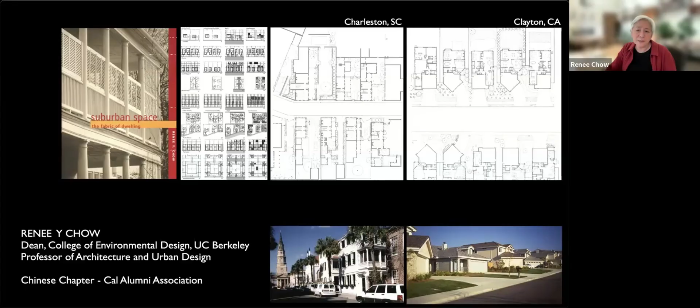Urban challenges of the 21st century, flooding and drought, resource depletion, and housing scarcity, all require solutions that are locally rooted. My research has been to develop analytic and generative design tools for mapping and transforming locales by integrating landscape, urban, and architectural systems across sites and across individual buildings. While adapting our communities for climate resilience, we can also build the unique legibility of every neighborhood. The two major contexts for my work, on the left, the American suburbs, and now the dense urban cities of China.

CED first began collaborating with HKU in 2005 when Weijen Wang and I both ran studios to design an interpretation of the Lilongs in Shanghai.

In 2019, as Chris referred to, the two colleges established a formal design research collaboration through the funding of Berkeley alums that include Chris, so thank you, Chris, to work on designs that addressed urban resilience in the two Greater Bays. We did one year of work around the Pearl River Delta, but the following year when CED was working on stormwater systems in Kennedy Town in Hong Kong, COVID hit in March and the studio was supposed to travel to Hong Kong the week later.

The year after that, we were remote, so the studio then worked in San Francisco. The Hong Kong studio did not work in parallel because they couldn't make it to San Francisco. But nonetheless, we transferred those lessons back and forth. And in 2023, the work of all three studios and the parallel work done at HKU was presented in Central Market in Hong Kong, and we had a great discussion there with academics and Hong Kong government officials.

So the title of my talk is Urban Waters, and this was the topic of the last two HKU CED studios. In this map that shows areas of high risk for flooding, heat stress, water stress, wildfires, and hurricanes, all of these items revolve around the challenges of having either too much or too little water. And we wanted to explore what architecture could contribute to helping to mitigate this challenge.

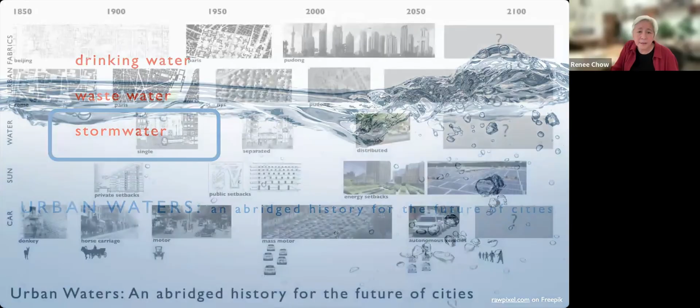So here's a pictorial history of cities in relationship to water, energy, and transportation systems. In the late 19th century, cities were continuous, low-rise urban fabrics, maybe 1 to 6 stories, as illustrated by Beijing on the top and Rome on the second row. Stormwater ran freely through the streets and paths of each city, following the overall contours of the local watershed.

In the early 20th century, there are three major shifts in urban systems. One is the introduction of storm and sewer water systems, which I'll talk about more in a moment. The second is the introduction of mass-produced motor cars and all of the street network required to support those cars. And then the third is the recognition that some medieval urban fabrics lacked light and air, so the proposed solution was sunlight setbacks, coupled with high rises spaced far apart from each other. All of this contributes to the breakage of the continuity of urban fabrics.

And so as we look at our current century, we can now see how this history of development has exacerbated our climate challenges. Today, cities are roughly 60 to 70% of global greenhouse gas emissions, primarily through energy consumption in buildings and transportation.

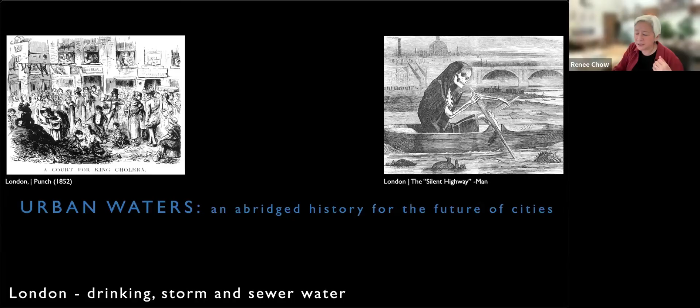But it wasn't until what was called the Great Stink of 1858 that the British government addressed the urgency of the problem and built a new underground sewage system throughout the city. They built what we now call a single or combined sewer system that carried both black wastewater and stormwater from the rains. The solution, at least at that time, was to avoid contaminating the potable water for the city.

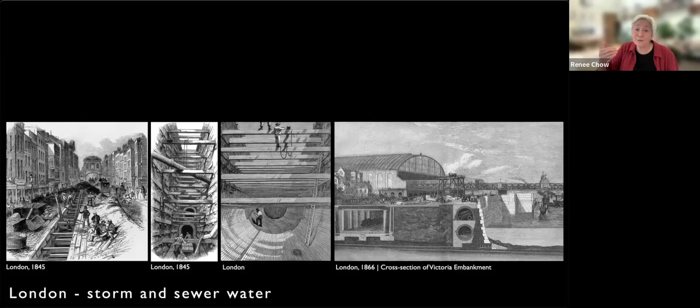The new sewer system discharged water downstream of the City of London. So potable water was taken upstream and contaminated water was discharged downstream. So while this system worked great for the residents of London, it was really not so good for the cities and the residents downstream of London. And this is the system that was implemented in cities throughout the world.

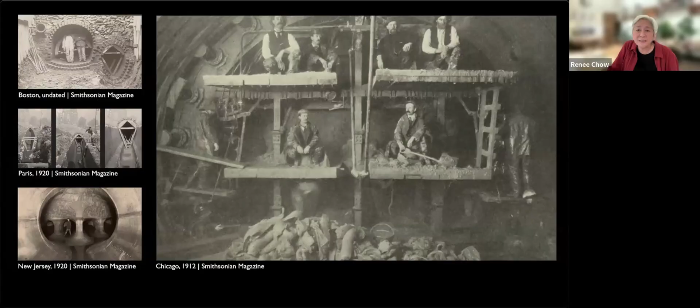So let's move back to our 2 case studies, Pearl River Delta and the San Francisco Bay. My first question, where does Hong Kong get its potable water? 80% of Hong Kong's drinking water is imported from China. The remainder comes from reservoirs and water desalination.

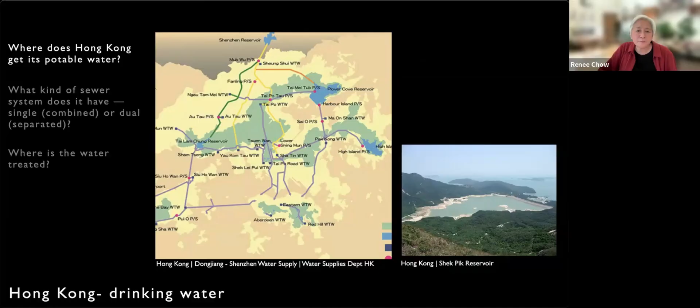What about Hong Kong's sewer and stormwater systems? In 1841, China ceded the island of Hong Kong to Britain. Thus, in the 1850s, Hong Kong adopted, or had thrust upon them, the British combined sewer and stormwater system that discharged to the surrounding bay. Thus, like London, Hong Kong has an extensive tunnel system throughout the island.

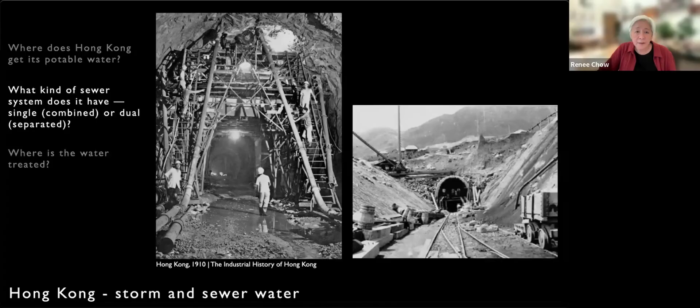At the time, the population on Hong Kong was less than 100,000, so the domestic sewage that went into the bay did not cause substantial damage to the ecology of rivers and the coast. But as the urban population grew in the early 20th century, the hygienic issues of the combined system emerged, just like in London, and the Hong Kong government built a separate drainage and sewer system, splitting the original combined system into two independent ones. So now the black water and the storm water are separated throughout the island, and as a result, they can be treated differently before being released into the bay.

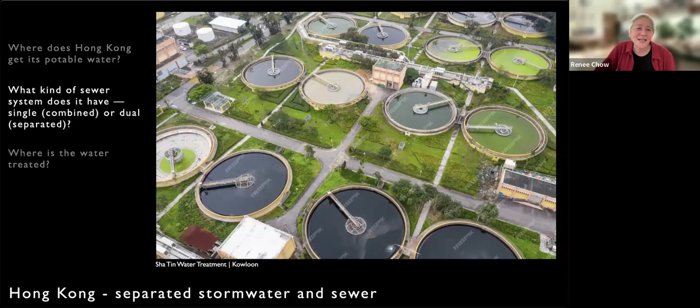One of the things really interesting about Hong Kong, potable water has always been in short supply. So it is the only city that I know of that has two supply water systems. It has the potable water system and it has a seawater flushing system. 80% of the toilets in Hong Kong use seawater. Chris is nodding - like the Hong Kong folks say, of course that is, but it's really exceptional. There really isn't another city that's doing that. So Hong Kong is unique in having two sewer systems and two supply water systems.

Nonetheless, with climate change there's an increased amount of rainfall in very short periods of time, and so Hong Kong continues to flood. In 2012, they built the West Drainage Tunnel Project, which is really an enormous project that runs the entire length of the island. The upper portion of the mountains are caught in these reservoir systems and discharge systems that go into the tunnel.

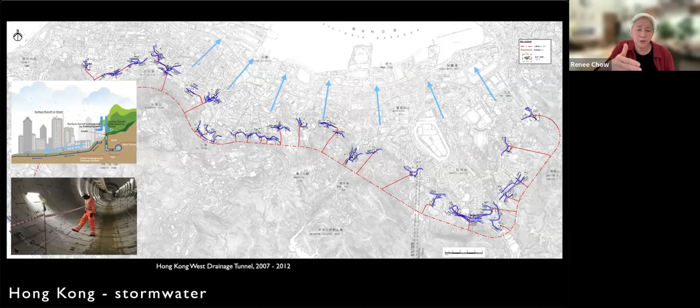And then the lower part, below the storm water tunnel line, flows in traditional culverts to treatment centers along the bay edge. So here's a map of where all those stormwater treatment centers are along Hong Kong Island on the North Shore.

So now let's go to San Francisco. I have a quiz for all of you Bay Area residents. You didn't think I was going to talk the entire 30 minutes.

So you're going to use the Q&A that I have over here. Where does the city of San Francisco get its potable water? And I'm pulling my Q&A over so I can see. Anybody? Any guesses?

I'm not seeing anything. Someone just type an answer, I think. Oh, hang on, yeah. Annette just typed an answer, and James Lee also. All right, excellent.

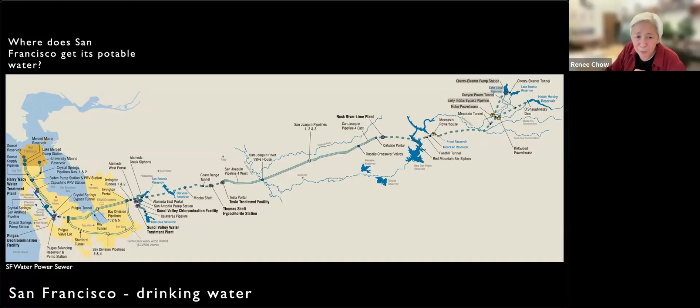I think Annette just typed in Sierra foothills. I think that was from before. In fact, we're actually closer to Yosemite. There we are. Similarly, the watershed north of Yosemite, and the water travels over 100 miles to reach the East Bay. No idea on the East Bay.

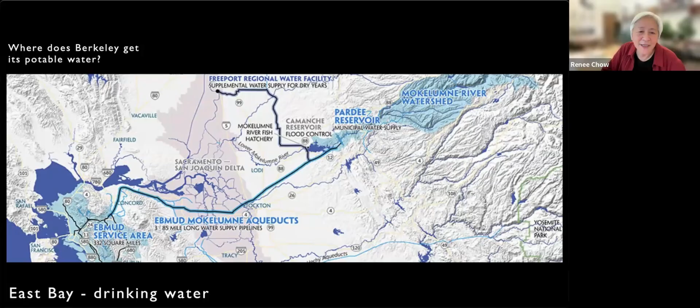Okay, here's another question. What kind of sewer system does the city of San Francisco have? Is it single or dual? In other words, combined black and storm, or separated black and storm?

A bad one, I see. Separate - mm-hmm, okay. San Francisco is separated - this is what we would hope. San Francisco is actually the only coastal city in California with a single combined sewer system that collects and treats both wastewater and stormwater in the same network of pipes. Kind of scary, huh?

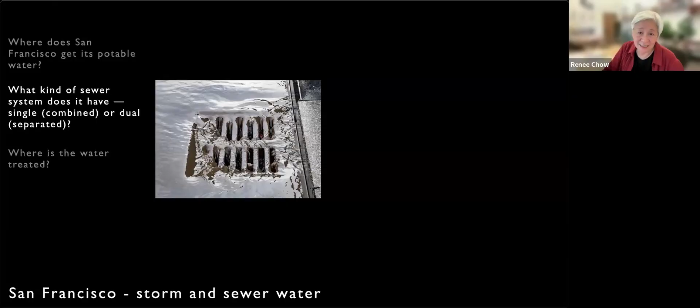So how is this affected by climate change? Stronger high-intensity rains mean that when the sewers reach capacity, black and storm water drain out into the bay and the ocean, bypassing the treatment plants, as shown in the upper right image of wet weather and combined systems. So yes, yuck, just like London in the 19th century.

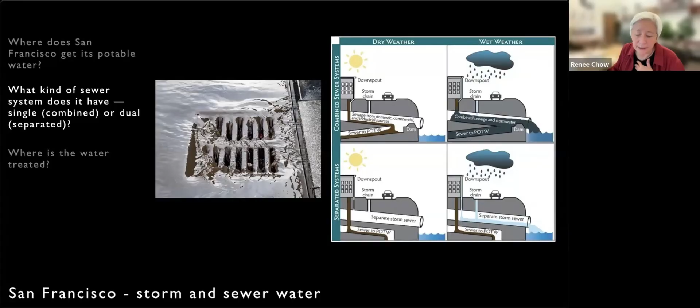To try to compensate for this, San Francisco has built large overflow reserves, built as tunnels under our streets. The black lines you see are where we have reserves to hold water during the rainy season. We have two treatment plants on the west and east side. 80% of the water is treated on the east side and discharged into the bay. The northern facility only operates in the wet season.

Unlike Hong Kong, we have less rainfall during our wet season, but we have much longer periods without rain. So with climate change, atmospheric rivers increase our chance for flooding, and prolonged drought increases our chance for fire. So far we seem to be having a nice year - I'm keeping my fingers crossed.

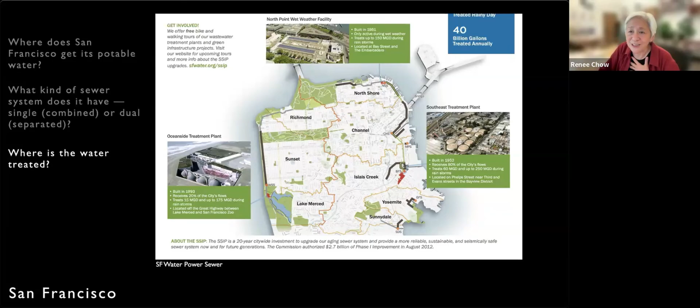Okay, so Hong Kong and San Francisco are typical case studies on the ways we deal with urban water. We have technologically improved a centralized 19th century approach, increasing the capacity of our system to provide, remove, and treat water. Yet these centralized infrastructures are no longer sufficient to address our contemporary climate challenges. We are learning that this is not enough.

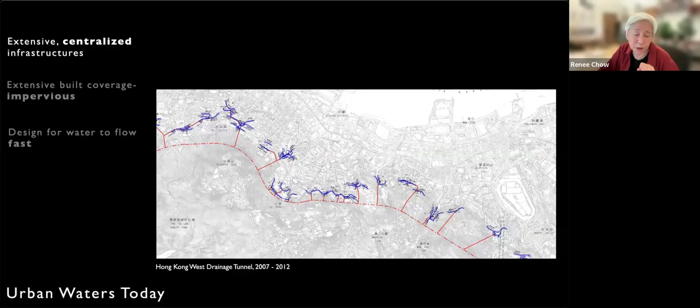So let me highlight three water characteristics of the 20th and early 21st century. They have extensive centralized water infrastructures - Hong Kong is a great example. They have extensive built coverage; our cities are increasingly impervious to water infiltration into the ground. We've built more roads, channelized more watersheds, built more buildings, and as a result we've made our ground impervious, loading more and more water more quickly into our centralized infrastructures.

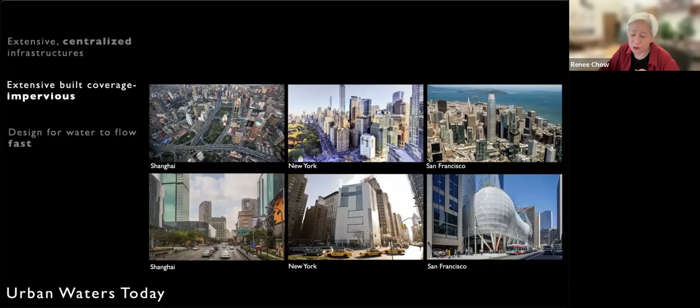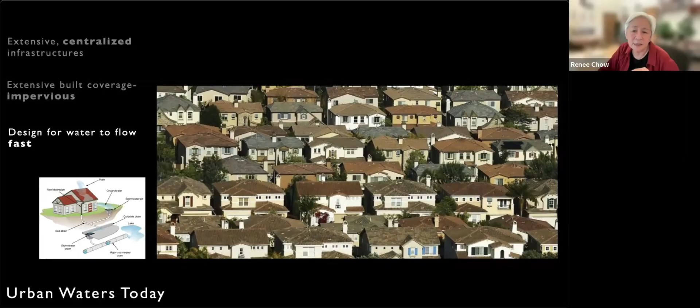More quickly, our cities all have buildings designed to shed water fast. Yes, water is damaging to buildings, there's no doubt about that. But the assumption right now is that we shed all of our water into the ground, into the street, that then sheds into the centralized system. This is not working for us. So as both Hong Kong and San Francisco reveal, our approach to urban water cannot address the climate challenges we're facing. We need new paradigms for urban water today.

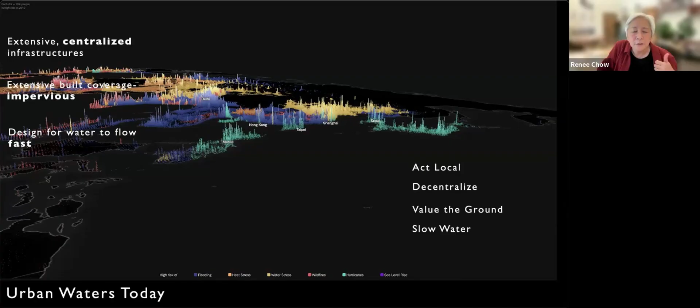For the collaboration between Hong Kong and Berkeley, we proposed four alternatives for our design studios: one, act local; two, decentralize; three, value the ground; and four, slow the water.

So our first case study was located in the northwest end of Hong Kong Island, called Kennedy Town. The site was selected because it typifies the section of Hong Kong Island, but in a compressed way, so that you're going from mountain to waterfront in a very short distance.

There is a question that I'm going to let Chris answer about Hong Kong, about typhoons and massive rain events. I'm going to say no, but I'm going to let Chris figure that one out.

The studio explored the potential for decentralizing, rethinking the ground, and slowing water at multiple urban scales. In this example, the student explored the building level, where the water is slowed down inside the building rather than shedding it on the skin and putting it immediately down into the ground plane.

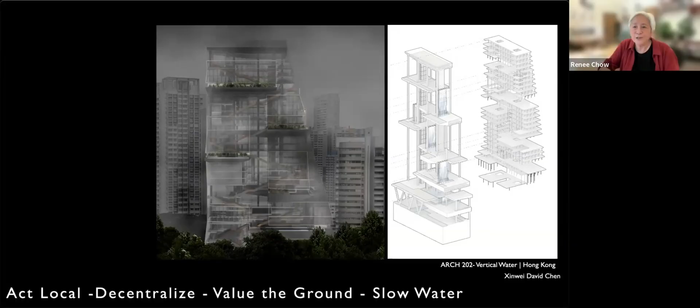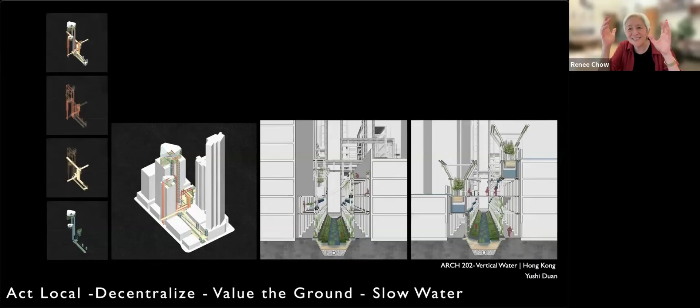Here, the student explored using the interstitial spaces between buildings to supplement the water that was going to the ground, so she could slow it in these walkways and green gardens that were suspended in alleyways.

And as in this third example, the team explored using the plinths, the sort of new upper ground that includes the elevated set of walkways that Hong Kong is so famous for, and the natural organization that most dense cities have to have some lower levels of retail or commercial, then a plinth level where you change construction types, and then upper levels of residential and/or commercial activities.

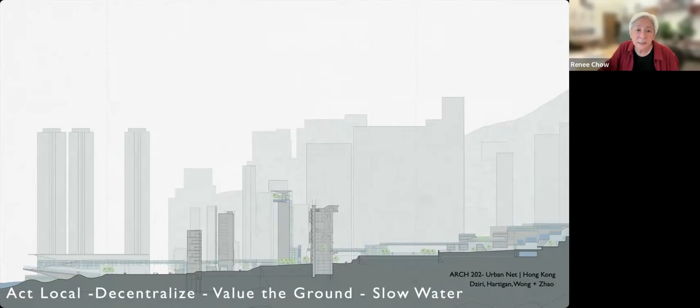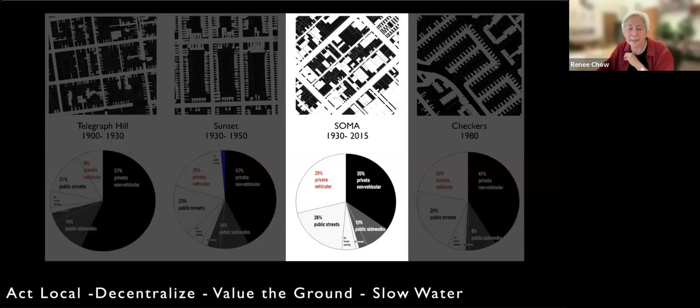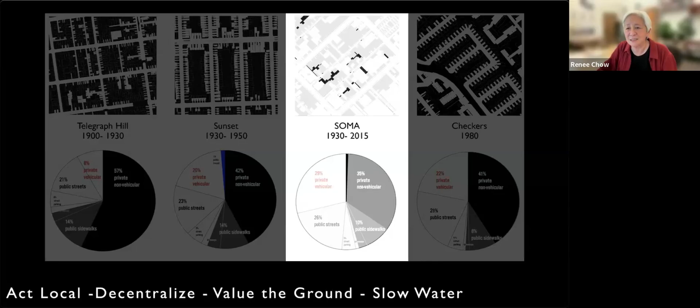Look at what you get. There's hardly any pervious surface left in SOMA when you take away car spaces and building spaces. And if you look at any aerial, it's no surprise that SOMA will flood in the winter.

So we really have to keep our fingers crossed when we have a season of drought and the Sierra snowpack is low.

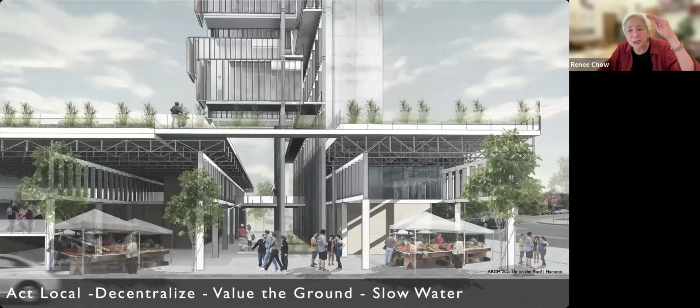So learning from the Hong Kong studio, we wanted to explore the idea of a new ground, a new urban watershed in SOMA. The idea was to relayer the section, to augment the existing stormwater system, to increase the value of the ground, to slow rainwater, and use the rainwater rather than lose it to the storm system.

So rather than letting the car use this valuable space, we explored a connected, animated, and walkable ground plane, valuing the ground.

Autonomous vehicles aren't here yet, and the cars still need to be parked somewhere. This illustration doesn't have the car there, but essentially the second level is where we decided to park the cars.

It was somewhat intentional because the new ground, the urban watershed, is sitting on top of the cars. So in case there's any leakage, the water goes into the car space, which is sort of capturing water as well.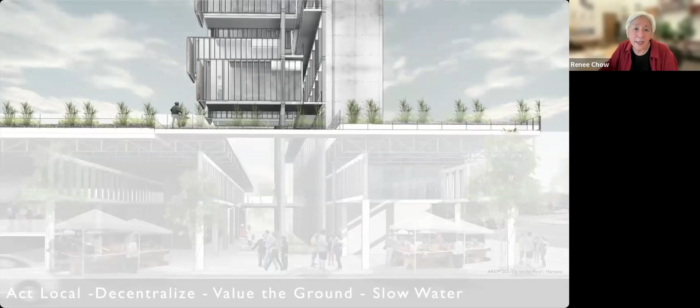And so now we're collecting rainwater for the urban farm that's on the plinth itself. And then above the new ground, housing, office, and other uses are sitting there. Housing in particular adds gray water that can help bring water to the urban farm during dry seasons.

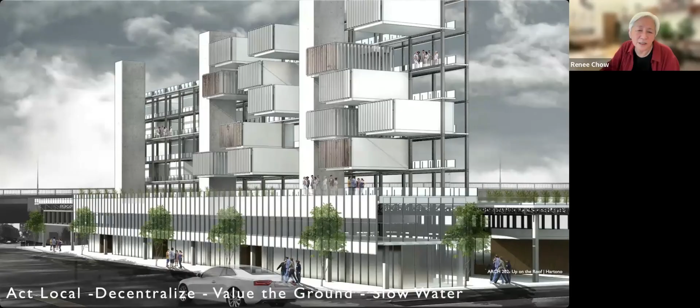So students made proposals based on this new paradigm. This is a student—we were looking at the work of Lewis Tsurumaki Lewis, who made this proposal for New York, a new urban watershed.

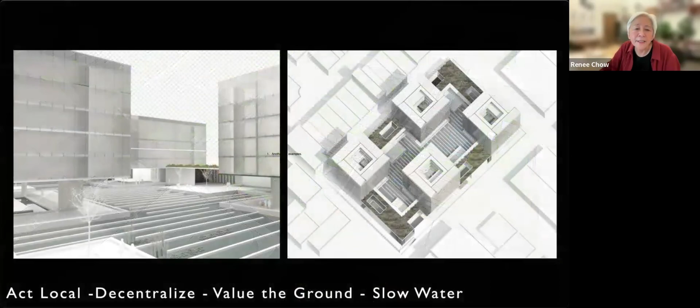And then a few other examples of student work showing, valuing this new ground. So almost at the end.

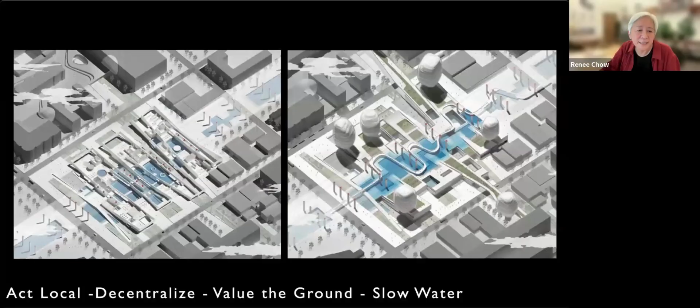Going forward, the Berkeley CED students are our future leaders of new urban water paradigms. We are at a time of needed disruption with innovators that will explore how all our urban systems will be disrupted toward a more sustainable future.

I'd like to acknowledge the recent loss of Kongjian Yu, the Beijing-based educator and landscape architect who pioneered landscapes as sponges. Our work really was to think about buildings as adding to the sponge network that Kongjian championed.